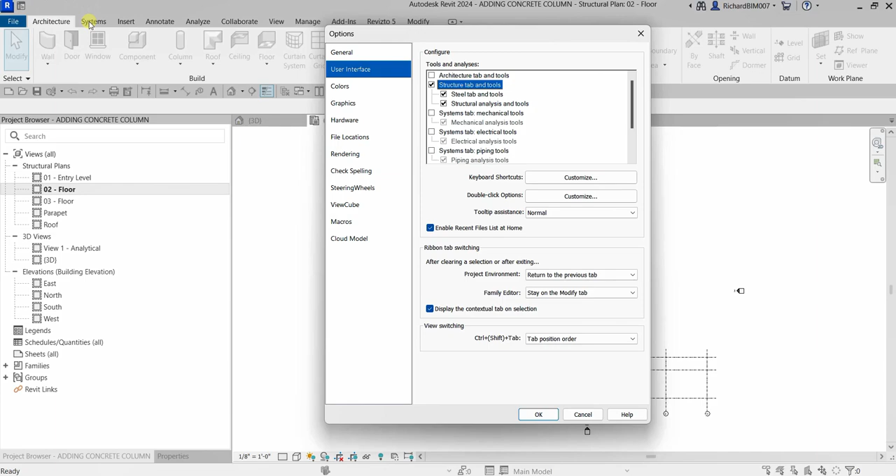So I'm going to uncheck the Systems tab, I don't use the Systems tab. I also don't use the Architecture tab, but I want the Structure tab. So I want to hide the Architecture tab and the Systems tab, and only use the Structure tab. I'll select OK. There you go, there's my Structure tab, and you can see the column.

If you go to the Structure tab, you can see your structural column. There's no option here for architectural column, so I'm going to select structural column.

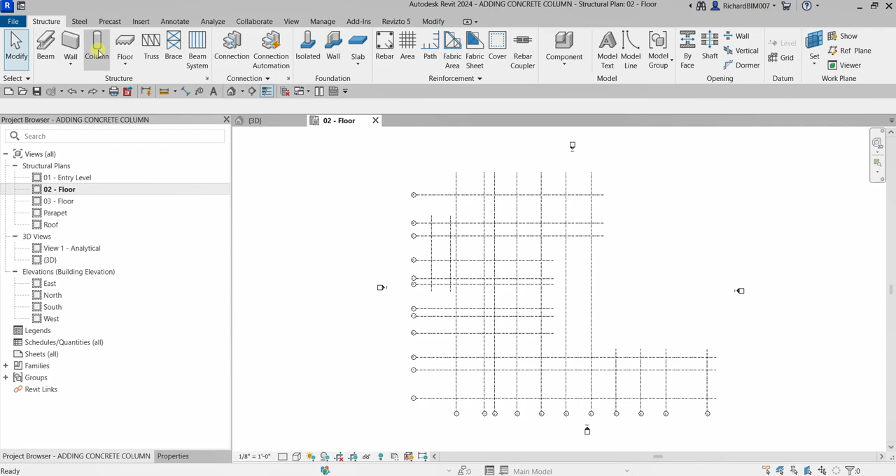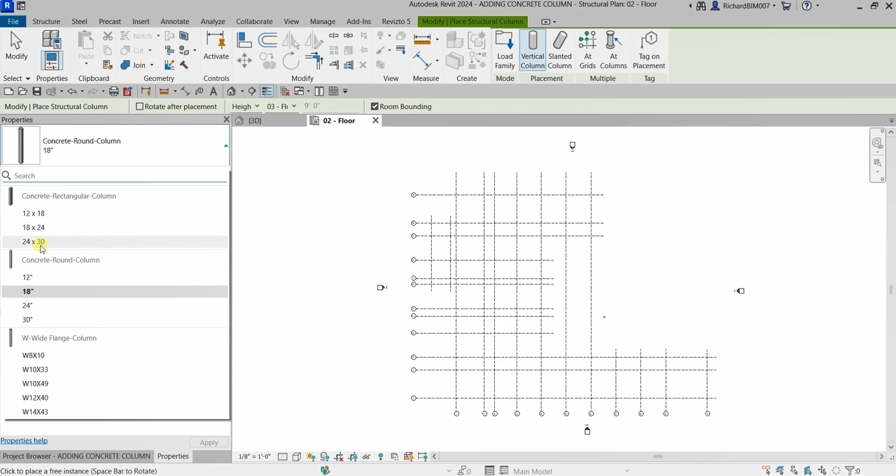Let's click this one, and then you can check the properties here. You can click that one, and you'll be able to see the columns loaded in this project. You have several columns - concrete rectangular column, concrete round column with different sizes, and also W wide flange column with different sizes.

For this exercise, I'll just use the default settings here. Another thing you can do here is check the type properties of the concrete round column, 18 inches. You can click that one, and you'll see the different parameters that you can specify.

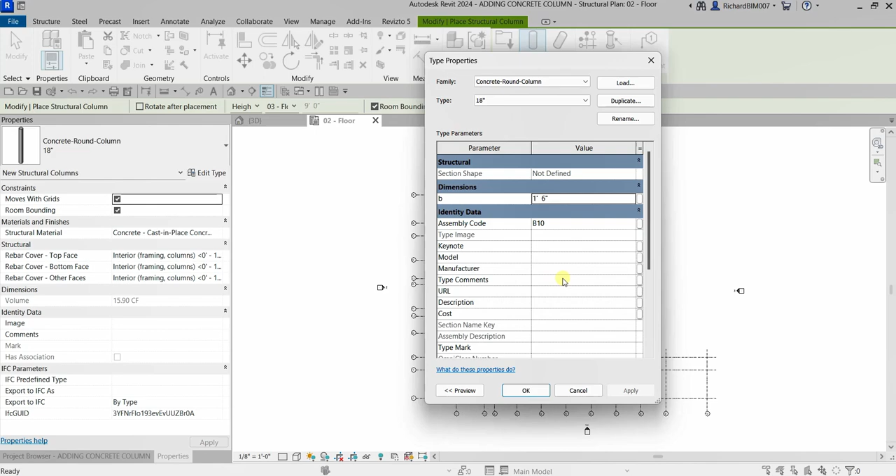You can put the identity data here - the keynote, model, manufacturer, whatever. I'll just select OK.

If you go to the multiple panel, you can see there's a multiple panel. What I'm going to do here is select At Grids, so I want to create structural columns at the intersections of selected grid lines.

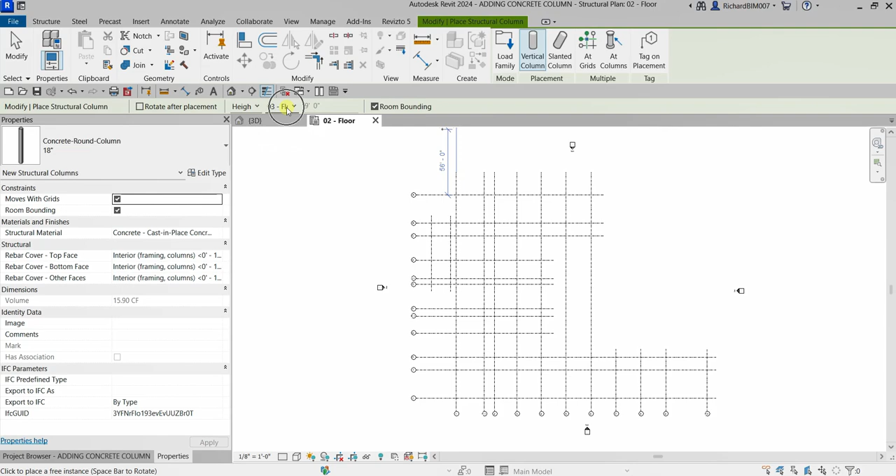Before I select that option, you can check your options bar here. You have an option like rotate after placement, and then the height. Currently my level is set to 02 floor, so when I create my column, it will start on 02 floor and end at 03 floor level. You can click that drop down arrow and specify the level you'd like to use to create your column.

You can even select an unconnected option so you can specify the height of your column. For now, I will be using 03 floor. But like I said earlier in my exercise, what I want to do is create a column that will start at entry level and end at 02 floor.

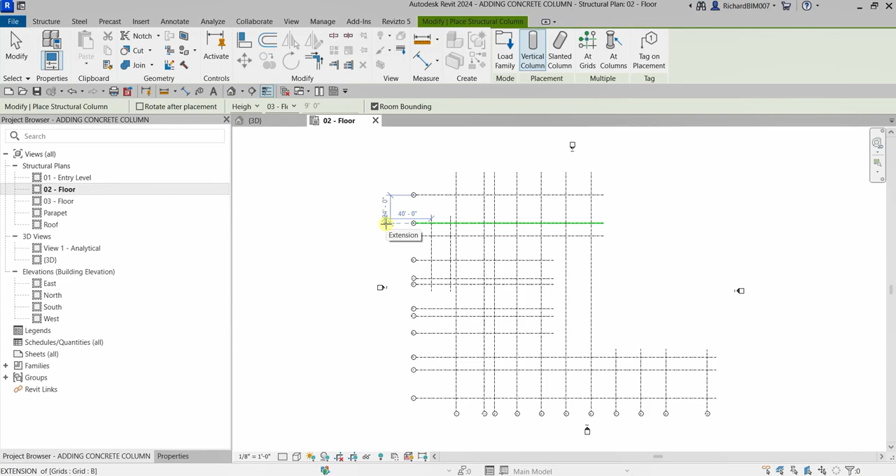So I'm going to show you how to modify it. Of course, I can simply just go to entry level and create the column - that's very simple. But what if you already created that on 02 floor? How are you going to modify that? I'm going to show you how to do that in a few seconds.

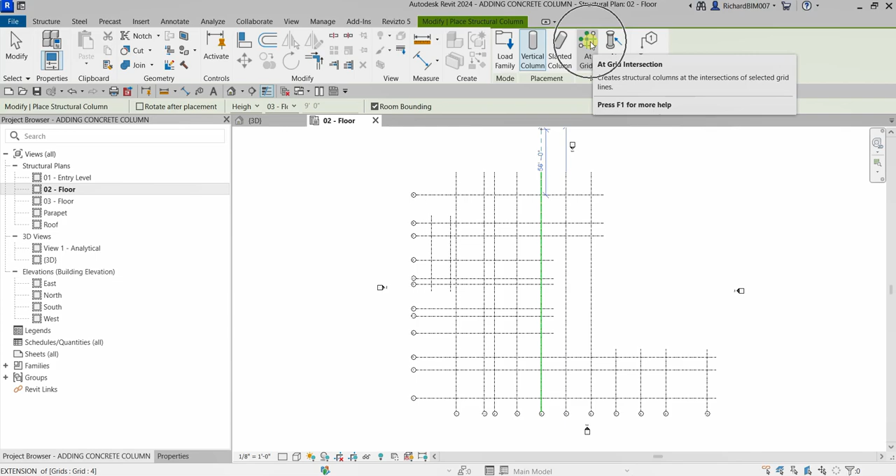I'm going to select multiple here, At Grids. Let's click this one. All right, the next thing we'll be doing is select all the grids, so I'm going to pick here.

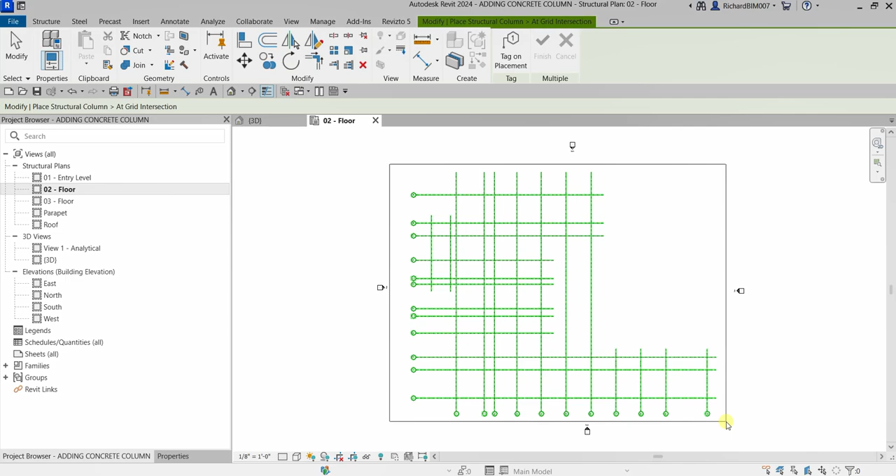Hold your left click and then drag until you select all the grids, until it highlights. Then release your left click. There you go. As you can see, there's the preview of your columns. Now the next thing I'm gonna do is select finish. And that's it, very simple.

Of course, you can do it one by one. You can pick on the intersection of grids, you can pick each one by one if you want, but this is how I want to do it. I want to select all of the grids and use the at grid intersection option.

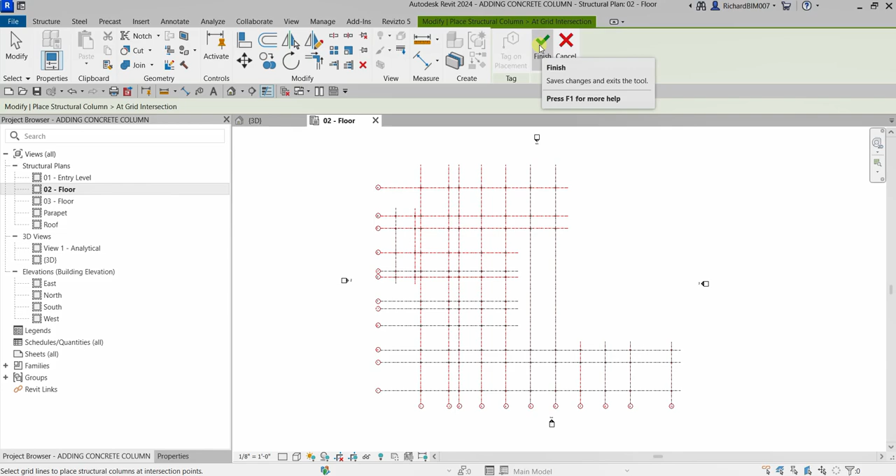So I'll select columns here, finish, click that one. There you go. And then I'm gonna select modify here. So there's now my column.

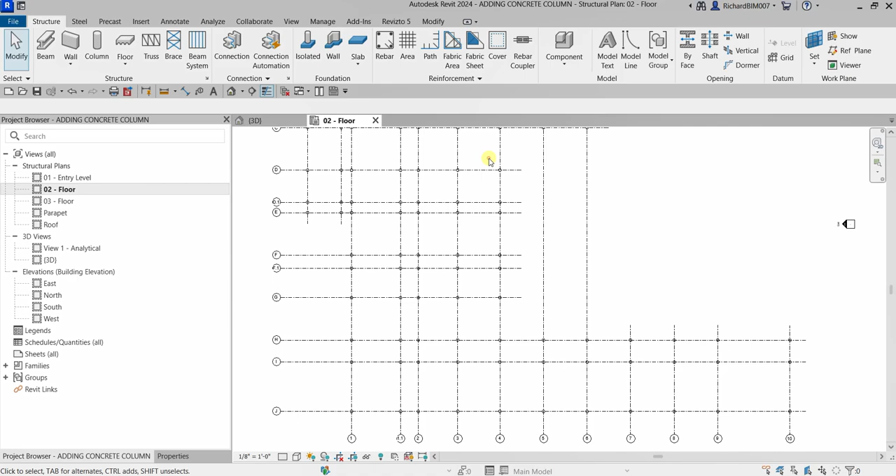I don't need the columns here from, what grid is this one? Grid 4. This is already outside the building. So I'm going to select all of this column here using window selection, and then I'm going to delete that. Or you can also press DE for the shortcut of delete, or press delete on your keyboard. Okay, delete. There you go.

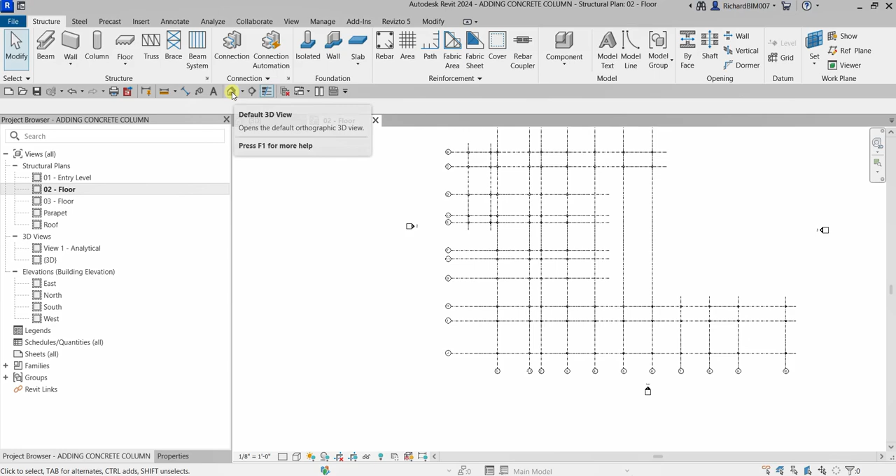Now let's check this one out in the 3D view. So let's click default 3D view. There you go. So there's now my columns.

I can change here on my view control bar the detail level to medium, coarse, or fine. So coarse looks like that, medium looks like that, fine looks like that. Okay, so it doesn't really matter for the meantime.

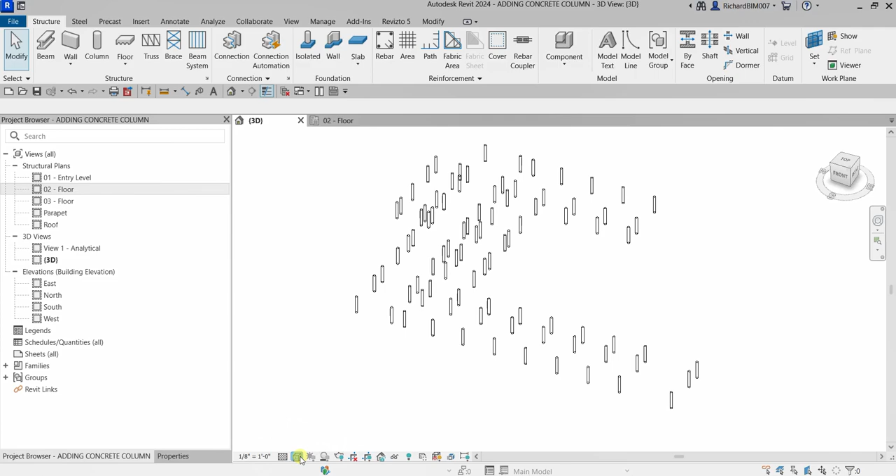Usually I use my detail level when I go to detailing view and also in Revit MEP. But for now, I'll just use fine. And for the visual style, I will be selecting shaded view. There you go, so there's the shaded view.

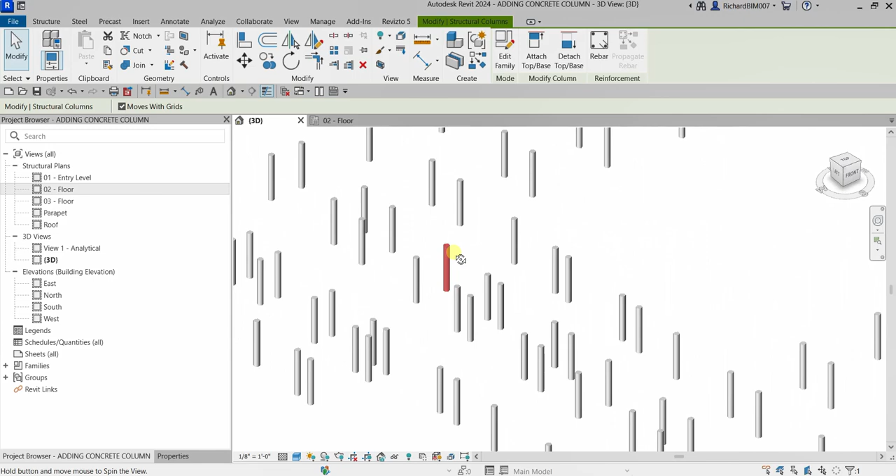You can hold the middle button of your mouse and hold shift at the same time, and then you can move your mouse while holding it both, so you can orbit the model. Another tip, if you want to concentrate your orbiting on one element, you just click it. So let's say this one, you can click that, and then from there you can orbit. Hold shift, hold the middle button, and then you can move your mouse. As you can see, the concentration of the orbit is on that selected element.

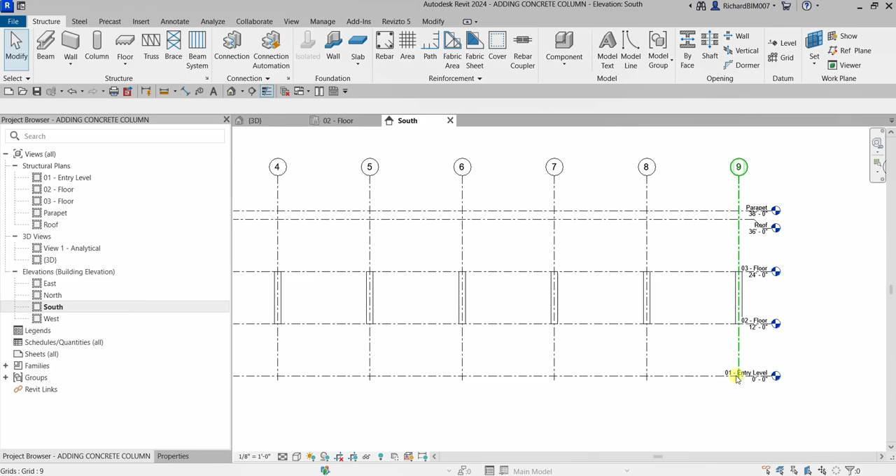Zoom out. So the next thing that I'm gonna do, I'm gonna change the level height, because if I go to the south elevation or any of the elevations here, like south, double click. As you can see here, it starts from 02 up to 03. So what I want is for that to be starting on 01 to 02.

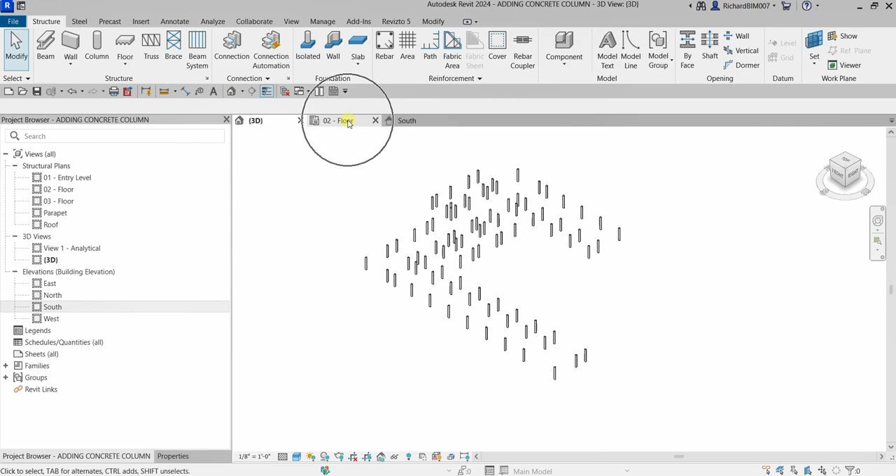Okay, let's check the 3D view. And then another way of selecting objects, because I want to select all the objects, of course you can use that selection, you can also use that selection, but you can also do this. Let's say I go to the 02 floor, so I can click one of the columns, right click, and then there's an option here, select all instances visible in view.

Okay, this one is the option that I'm going to use. Click that. There you go. So it's now all selected. And then after that, let's check the properties.

Of my concrete column, you can see here the base level. So the base level is on 02 floor, so I'm gonna change that to 01 entry level. And then for the top level, instead of 03, I'll select 02. That's it. You can also specify here the base offset or the top offset, I'm gonna show that to you later. So I'll just select apply first.

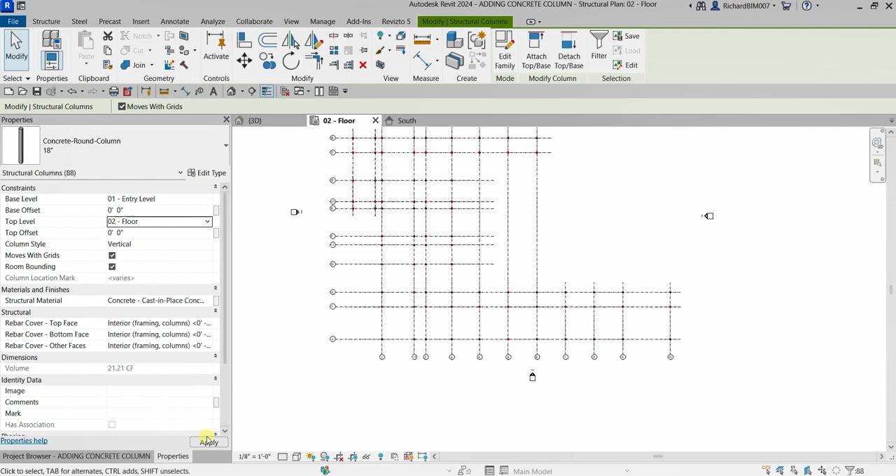There you go. And then if I check the elevation again, click, and there you have it. So maybe I'll click one level here, and then I'll drag that so I can see it nicely. There you go. Click, let me drag this.

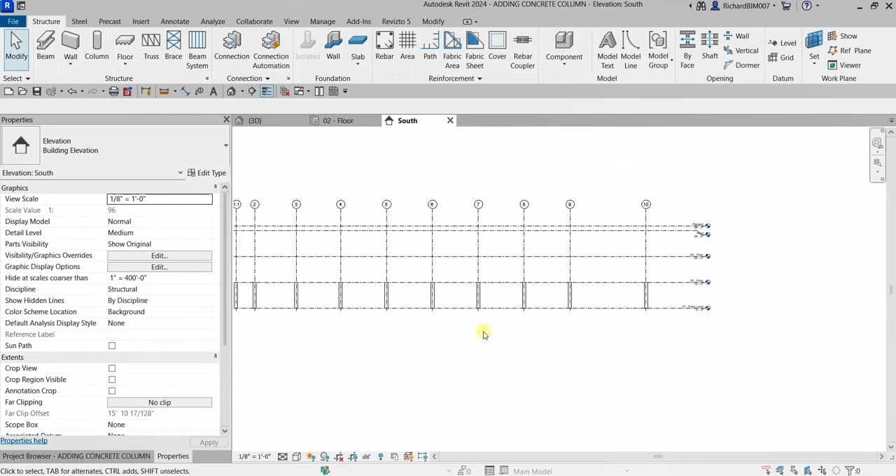All right, now oops, I want to tidy up my model. There you go. Now I'm going to select one of the columns just to show you what's the base offset. Base offset is the offset on the base part, and the top offset is on the top part.

So let's say from the entry level, I want my base offset to be going down, so I'm gonna type minus, for example, 3 feet. So I'm gonna type -3, and then the feet symbol, and then apply. So as you can see, that's the base offset.

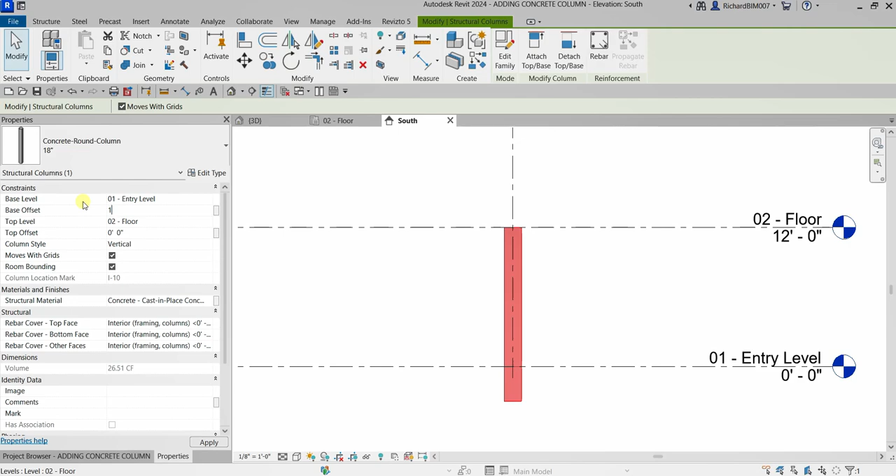Okay, and then you can also specify a positive base offset. So like from entry level, I want to offset like 1 foot. So I'm gonna type here 1 foot, and then apply. There you go, so there's the base offset, right? Okay, then I'll just put it back to 0.

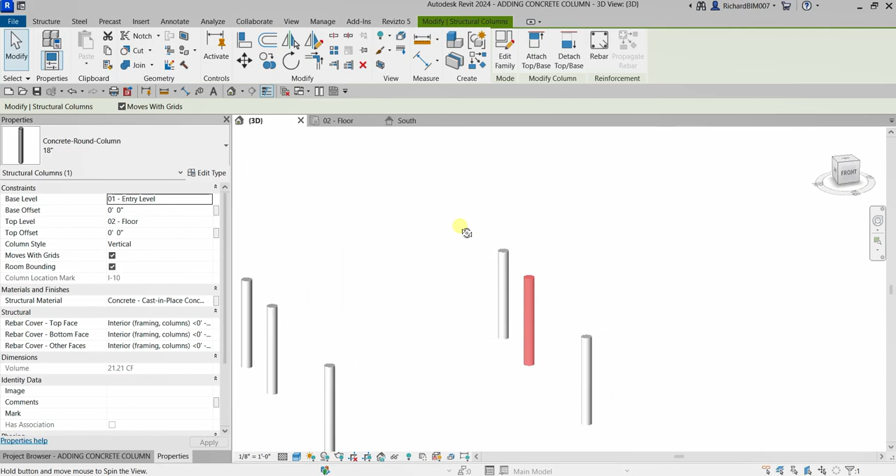Now the other one here is I select, let's check that one out in 3D, this one. The other one is top offset, let's see that, just orbit a little. Okay, so let's change the top offset to, let's say, 5 feet. 5, apply. There you go.

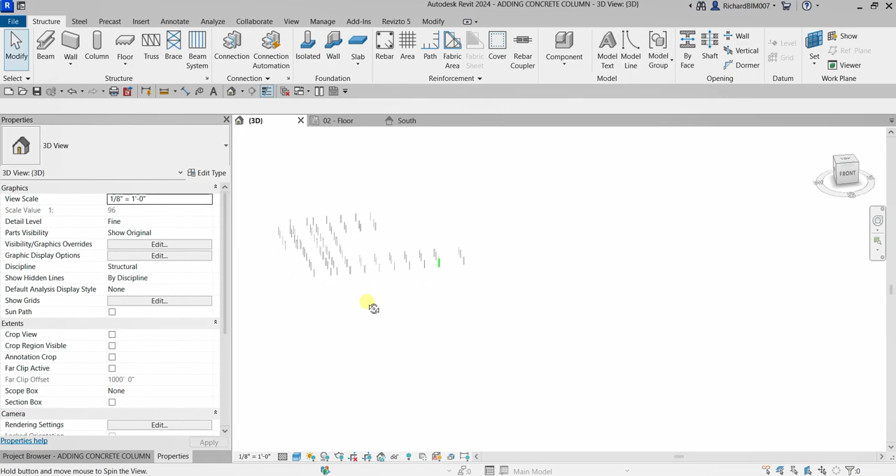Okay, you can also put a negative value, so -5, apply. There you go. So that's how you use your base offset and then top offset. So that's it for this simple exercise. Hopefully you learned something from this video. Thank you for watching, have a nice day.